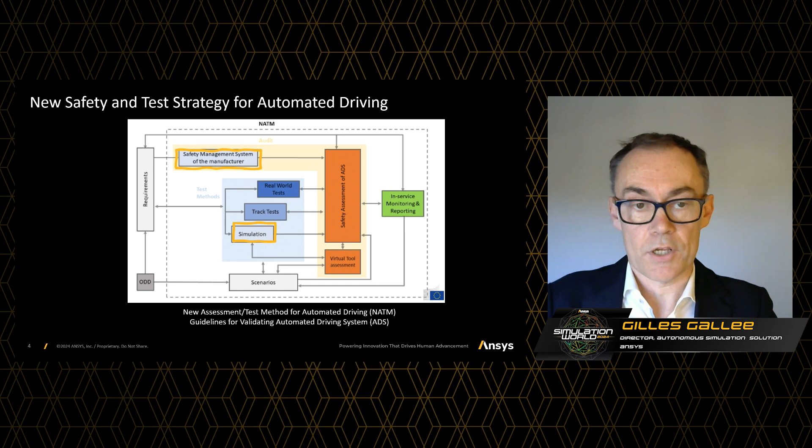For you as an autonomous vehicle developer, you have to build the safety argument, showing that the system that you develop is safe. How do we do it? We support this continuous development with safety analysis and safety management in order to build a robust design with a systematic model-based approach for safety and cybersecurity, supporting the scenario-based validation to demonstrate the safety of the known and unknown scenarios using simulation. And then when you are going on the real drive, you can correlate simulation with real drive samples, but also extract scenarios and probability of occurrence that can be reinjected into the simulation platform for further testing.

So the way we support these new methods is represented in this triangle. It's a three-pillar approach with tools to perform the digital engineering in your environment. So from safety analysis on the bottom left to the digital safety manager in order to keep track of the safety evidence, and then of course executing the scenario-based validation using simulation. And this triangle of tools shows how to implement the methodology.

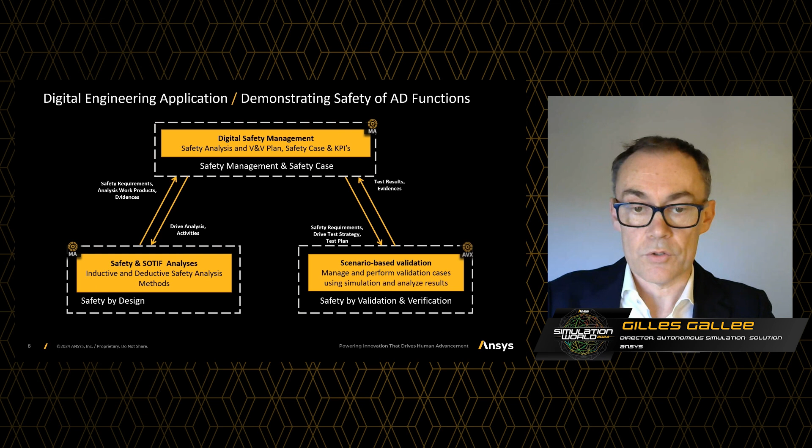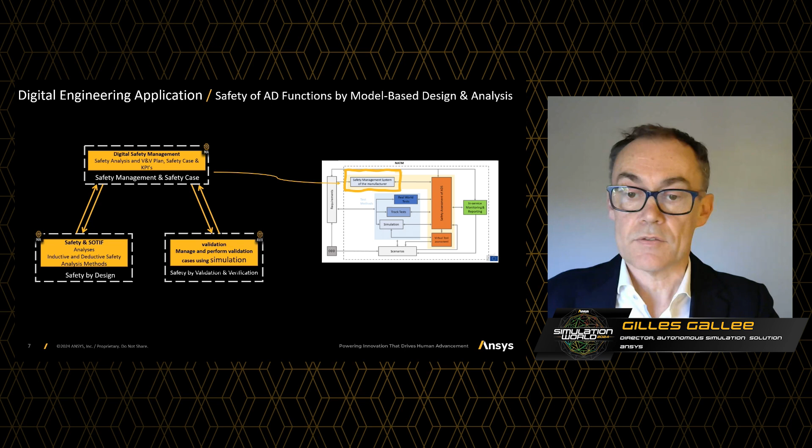So first, let's get into the Ansys digital safety management. And here on the slide, I just correlate what we deliver as tools from Ansys to support this new methodology. Ansys tools match and support the methods and framework, and can help you and the different organizations to implement this new standard inside the organization.

So the first important aspect is at the design level, to perform model-based safety analysis in order to help comply with the different functional safety, cybersecurity, and SOTIF standards. It helps you and the safety engineers to build an incremental safety case, and also because you continuously develop and release new autonomous functions, you have to ensure that you are tracking the right safety activities and managing the overall activities. That's exactly what Ansys is helping you to do. And the customers who have already implemented this safety management tooling are gaining productivity and reducing cost.

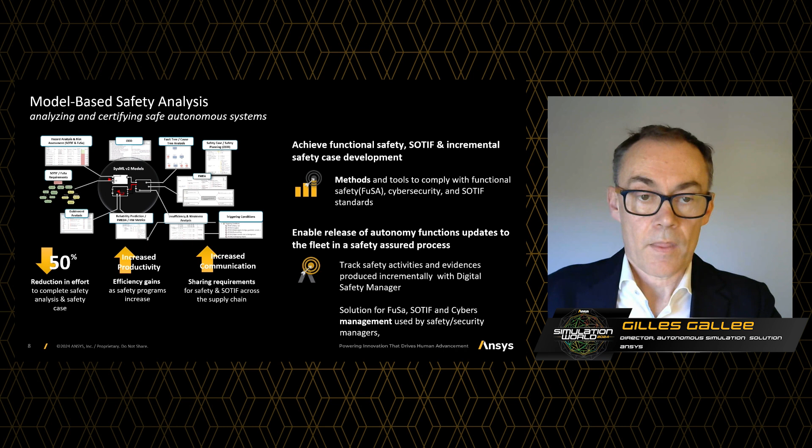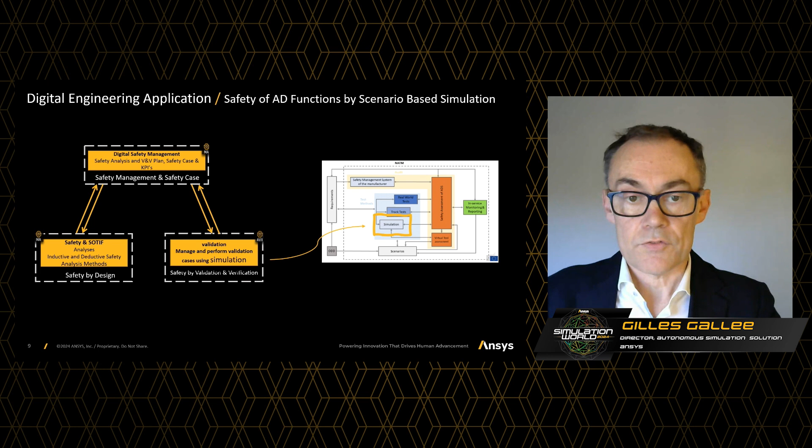Now let's focus on the simulation part and especially on how Ansys helps you to implement efficient scenario-based testing as part of this framework using Ansys tooling. Most of the simulation tools today in the market were developed in the past for low-level ADAS. Now modern simulation tools must be flexible in order to test software components or the software stack as part of your targeted test strategy. In this view, you can see the vehicle software stack, and we basically identify two main blocks, the perception software stack on the left, and the planning and control on the right.

Each of them requires a particular simulation environment. For perception, it's mostly focusing on open loop simulation and physics-based sensor modeling with a 3D model of the world, whereas on the right side for planning and control, it's mostly scenario-based testing and closed loop with maps and perception models. But also, it's important to have full stack testing, which requires all the components in order to deliver accurate simulation. And that's exactly what Ansys is doing, providing essential simulation technology in order to build an efficient and certified toolchain.

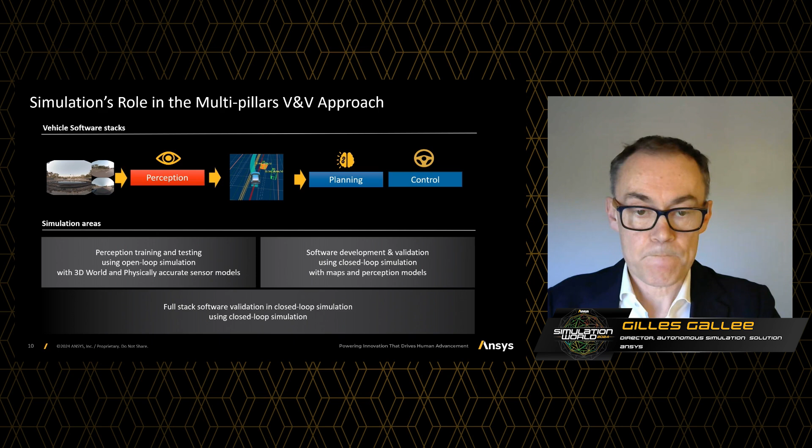So the first simulation technology is the ability to simulate sensor inputs based on physics simulation. Simulating sensors is a must-have in order to reduce the physical drive. It enables to significantly reduce the quantity of real drive by replacing or complementing the recorded data from test cars by synthetic sensor data.

And what we are learning from our customers is the higher the level of autonomy, the more crucial is the virtual testing of the software stack, especially perception or full stack. And this is where physics-based sensor modeling is really important, especially going on hardware in the loop or software in the loop in the cloud. And such approach requires proven physically accurate sensor simulation.

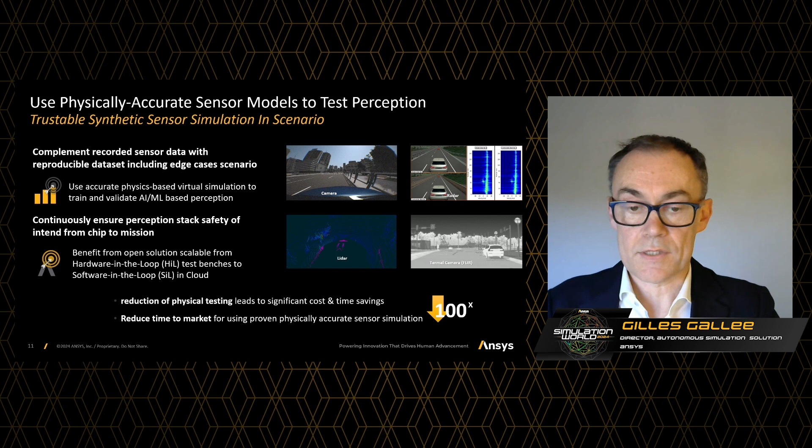But what does it mean exactly? What does physics-based simulation mean? From our perspective, accurate physics is absolutely required. It's mandatory for the development of autonomous cars. And sensors like cameras or radars, even if they are powerful, have limitations. And that can lead to very critical edge case scenarios. Understanding the physics behind these sensors is vital to anticipating and mitigating these challenges.

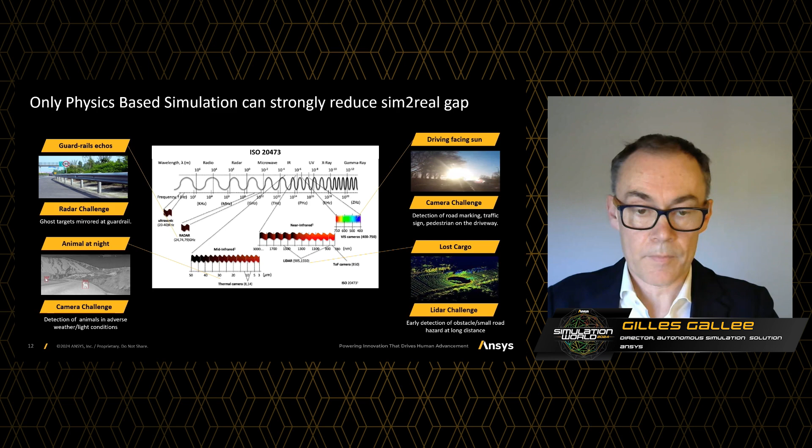And by accurately simulating real-world conditions and providing physics principles inside, we can narrow the gap between virtual and real environment. That's what we call the sim to real gap. And using physics-based sensor models in virtual scenarios enhances the safety and the reliability of autonomous systems faster and cheaper. And that's exactly what Ansys is doing.

You can see in this slide different simulated scenarios from different perspectives of different sensors, and that's exactly what we do by providing proven physics-based solvers into a unified multi-sensor simulation environment. It's GPU-based, and it enables to elevate the scenario-based testing capability to a level that was not achieved before.

And these tools are not only valuable for testing purposes, but also for AI and machine learning training, simply because through simulation, we can automatically generate the sensor signal as well as the labeling. So this is a tremendous win of time.

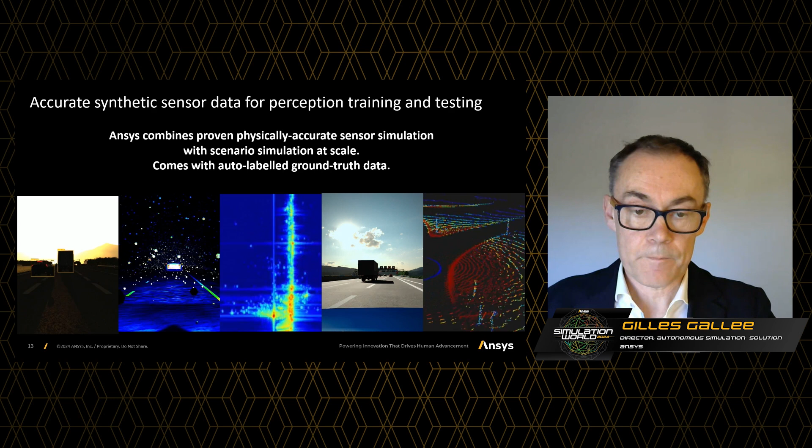Now let's talk about simulation at scale. The objective is to continuously integrate and validate the software function against logical scenario variation at scale. We are talking here about hundreds of thousands of scenario variations. What we do is to enable the continuous evaluation of the performance and the reliability of the software function against this scenario variation. The Ansys simulator is OpenSCENARIO based, is ISO 26262 certified, and it enables to optimize the scenario variation using smart methods.

And all in all, it enables to strongly reduce the cost of testing. First, transferring the real drive into virtual, and second, optimizing the quantity of simulated scenarios to focus on the most important and the most critical. So that's what we see in this slide.

And it's a demonstration of what is really unique to Ansys for you as a customer: how to perform effective optimization of the scenario variation in order to provide safety evidences for you to prove the safety case. The simulation helps you to understand the limitations of your system. It allows to detect the safe and unsafe areas to calculate the probability of failure of your software.

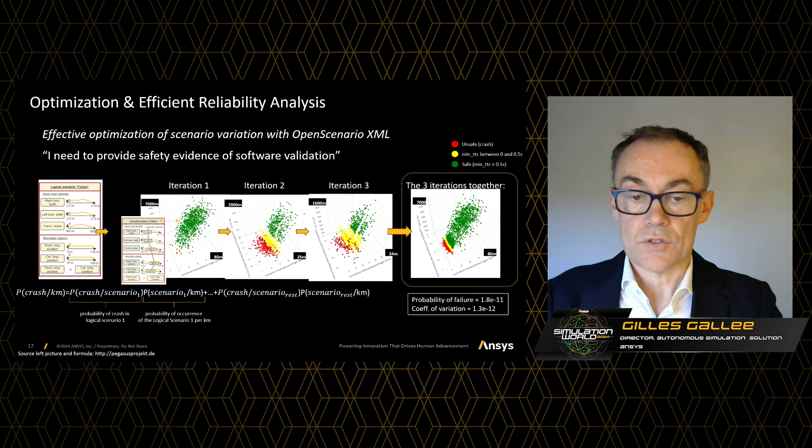And behind this, we are using smart methods in order to quickly identify the limit by doing few simulations on the perfectly safe domain and to focus the simulation on the limit of the function, or what we can call the edge cases. At the end, combining Ansys and cloud enables to go faster and at much cheaper cost.

So with that said, I wanted to show you how we help autonomous vehicle developers with safety management using model-based analysis, as well as scenario-based simulation at scale, for you to prove the safety case and to put safe vehicles on the road.

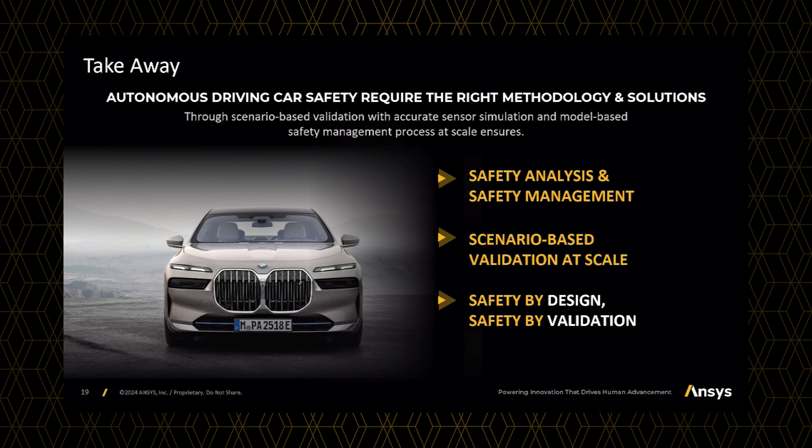Now, I would like to give the stage to Philipp Reinisch, who is head of data-driven development at BMW, and Philipp will tell you how BMW is using Ansys to achieve autonomous vehicles. Simulation at scale actually is what you need when you want to develop autonomous driving in a safe way. Within the next few minutes and slides, I would like to present how we use the Ansys toolchain at BMW to test, to validate, and actually to finally approve our level 3 system.

The main principle is depicted here. You see on the right side, we kind of virtualize our BMW 7 Series, which is the car where you can actually buy the level 3 system, in terms of all the sensor models, in terms of driving dynamics, and of course in terms of the function that you want to test, so the system under test. As environment simulation, we're using GTGen, which is OpenSCENARIO-based, that we developed together with Ansys in a cooperation that we had over the last years. And to explore and analyze, we're finally using the AVxcelerate toolchain that Tony just presented to really see the results of our simulations.

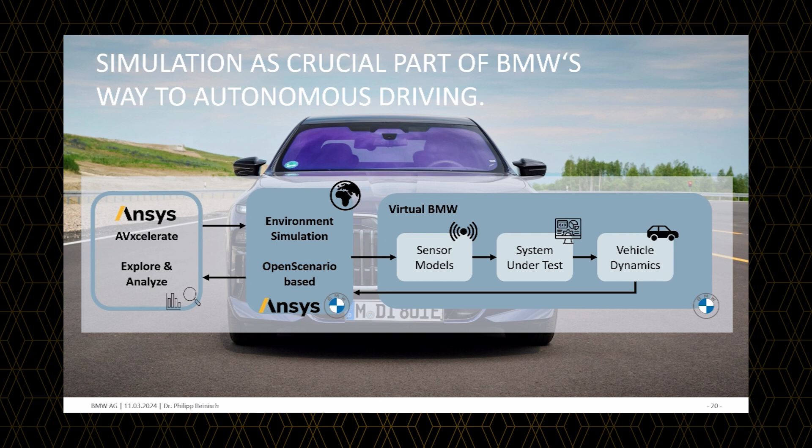Among others, there are maybe two main use cases where we use this toolchain and the simulation. The first one is acceptance tests. You can imagine acceptance tests as little functional tests that a developer can really run on his local machine, but all of the acceptance tests are also being run when you push your code into the repository as part of the CI. For the level 3 system, there were roundabout 1,000 acceptance tests that we were using, and these were all linked to the original requirements. So by this, you're really making sure that your testing is fulfilling all the requirements and is data and test-driven along the whole development process.

And the second main use case is the parameter variation. The main difference from parameter variation to the acceptance test is basically that with the acceptance test, you have one defined scenario that you're testing. In parameter variation, you take the whole set of possible scenarios around this one scenario. So you're varying speed or distance to objects and stuff like this. And by this, you can, on the one hand side, test predefined scenario catalogs like, for example, ALKS or NCAP. But on the other hand, you can also find edge cases when you have a defect that you found in real-world testing and try to find out if your fix is working for all possible scenarios around this one predefined scenario.

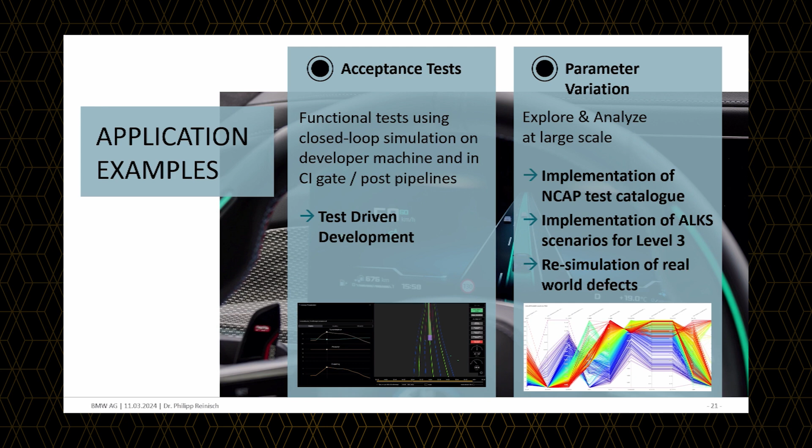So when I was saying simulation at scale, to give you a bit of figures for that word scale, in 2023, we were driving on our virtual roads more than 20 million kilometers, which is actually halfway to Mars. I hope we'll be there this year, and I also hope we'll go back eventually. So you see, it's really a lot of simulation scenarios and kilometers that we are covering by simulation.

And now, let's have a look at the result. Like I already said, we're having the BMW Personal Pilot Level 3, that's how the function is called, in our 7 Series. It works just like the system that Jürgen presented at Mercedes, up to 60 kilometers per hour. You can take your mind off the driving task, you can do something else, you can write emails, you can watch a movie. And of course, the system is designed in a safe way, so it's handling all critical situations. For example, a close cut-in maneuver that you can see here, and also obstacles on the road. He's quite relieved, right? All right, like I said, available in the 7 Series from now, and basically developed and validated by simulation together with Ansys.

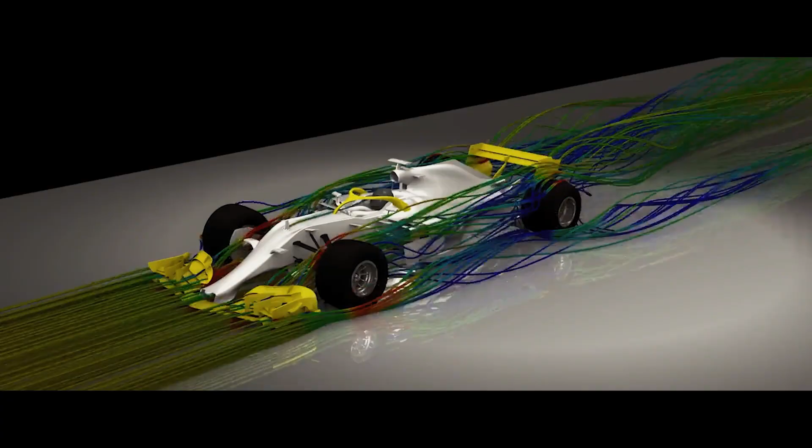How do you build a champion? In this era of Formula One, it takes a balance of skill and science, adrenaline and engineering, a passion for disruption from the design lab to the pit lane, and the drive to not only be faster, but more innovative than the competition. Today we find ourselves an hour's drive north of London at the home of one motorsport team whose mission is to win and to do it differently. Join me as we kick off this journey with a peek behind the curtain at one of F1's hottest and most competitive teams, to explore how engineering simulation is helping to unlock a competitive edge and push the boundaries of what's possible both on and off track. I'm Emma Walsh, and this is Driven by Simulation.